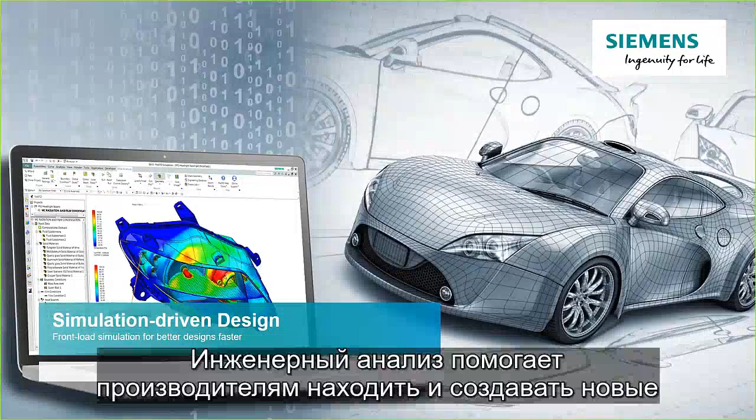So the age of simulation-driven design is here. Simulation is no longer just a performance validation tool. Simulation is becoming an organic part of the development process throughout concept and design. Simulation is leading manufacturers to discover and produce new, unimagined design possibilities aided through new manufacturing processes such as additive manufacturing.

Simulation is also helping designers create better, more robust designs earlier in the development process, while also speeding the overall time it takes to release a design, meaning faster time to market. In this presentation today, you will learn more about this new age of simulation-driven design, see how it's made possible, and learn how other companies are taking advantage of this new age today.

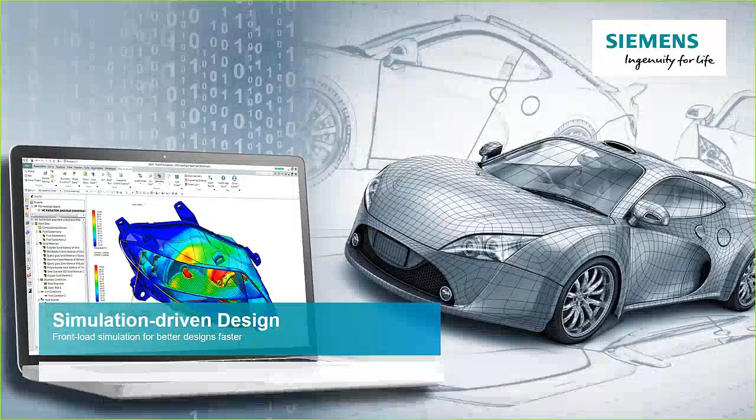So manufacturers today face many of the same challenges to stay competitive within their industries. There are bottlenecks in the development process that hinder them from being nimble and making decisions too late. Manufacturers are always looking for ways to cut costs and increase the bottom line. But cutting costs must also be balanced so as not to impact product quality for fear of losing customers. In a competitive environment, product developers are constantly looking for ways to decrease time to market so that you can introduce new innovative products before your competition can. This helps lead to greater reputation and more sales.

There's also continuous pressure to create a stream of new products of increasing complexity and functionality. But how do you reconcile this time with the time it takes to innovate with the increased pressure to deliver new products to market sooner? And finally, there's an increasing number of product regulations for companies to comply with around the globe, plus the need to reduce warranty costs, which also impacts your company's reputation to your end customers.

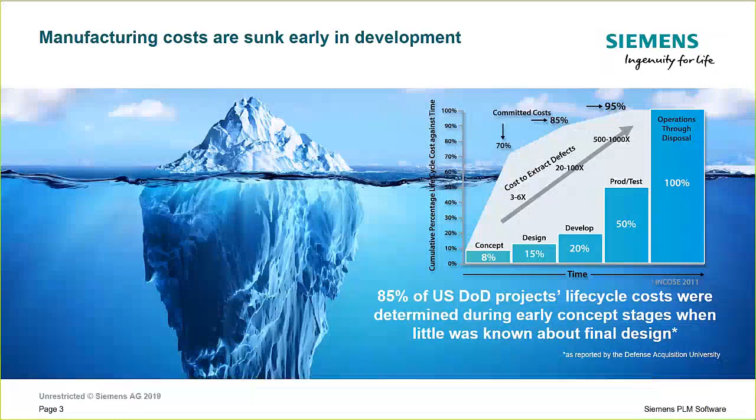Digitalization and simulation have already been game changers in helping companies find issues with their designs earlier than ever before. Simulation can have a huge positive impact on our ability to respond to these changes and has allowed engineers to gain more insight into product performance earlier than with older build and break methods of development. The advancement of simulation has led to increased confidence in simulation results. This means companies are relying more on simulation to reduce product development time, to meet market pressures, and to deliver products earlier.

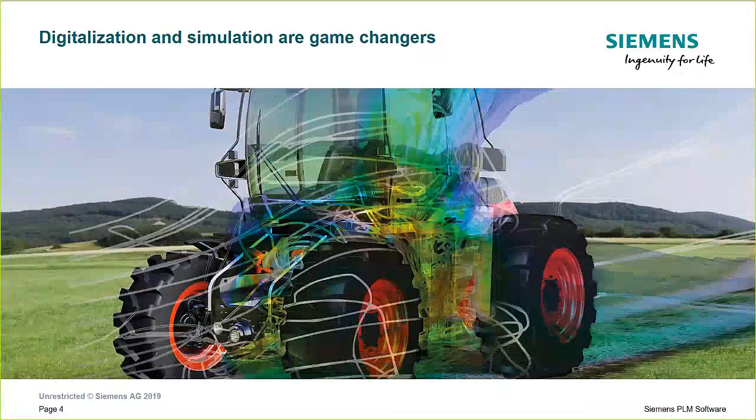So let's consider the benefits and challenges of simulation as it's been traditionally used to date. Simulation has reduced the need for physical prototypes, and gone are the days of iterative build and break cycles of the past. This has greatly reduced development costs and has also sped up development processes.

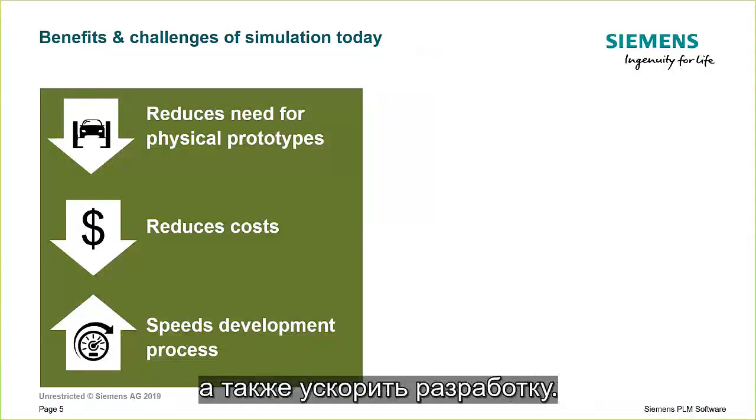But traditional simulation still has its challenges. Simulation has been a complex, multi-tool process requiring simulation experts in each of the physics domains. It's also an iterative process between designers and analysts, where designers would come up with a design and then wait for analysts to provide feedback on their design. And since there are usually far more designers than analysts, the CAE team was often overwhelmed, and designers would wait a long time before moving forward with changes to meet performance requirements.

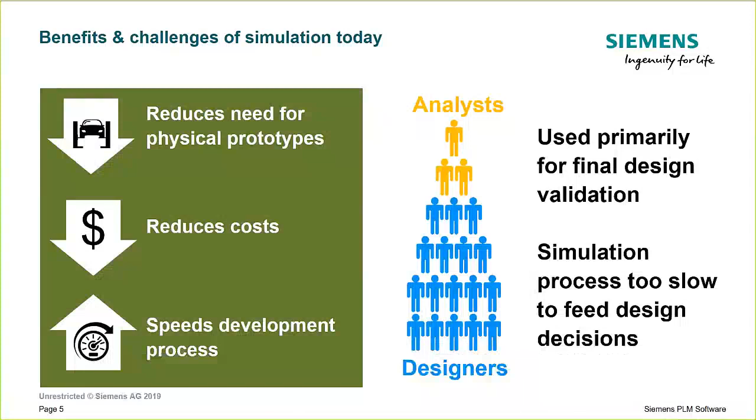What this means is that traditional simulation is a bottleneck. Designers first create the first iteration of a design, then hand it off to the simulation team for feedback. But the simulation team is overwhelmed, and the traditional CAE process is time-consuming, which means it takes a very long time before the simulation team can provide feedback to the designer.

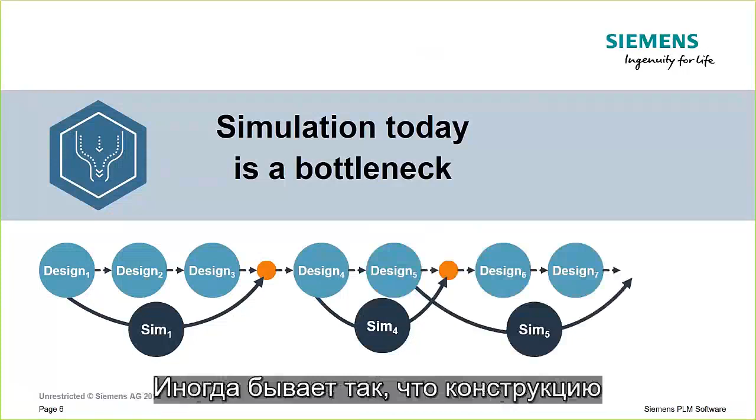So many times what typically happens is that the designer continues to iterate on a design just based on educated guesses and prior experience. By the time results come back from simulation, the results are already out of date and out of sync with the latest design. This process would continue for a number of iterations, and it often might be that a design gets released before the development organization is fully confident it can meet performance requirements. They hope it passes final testing.

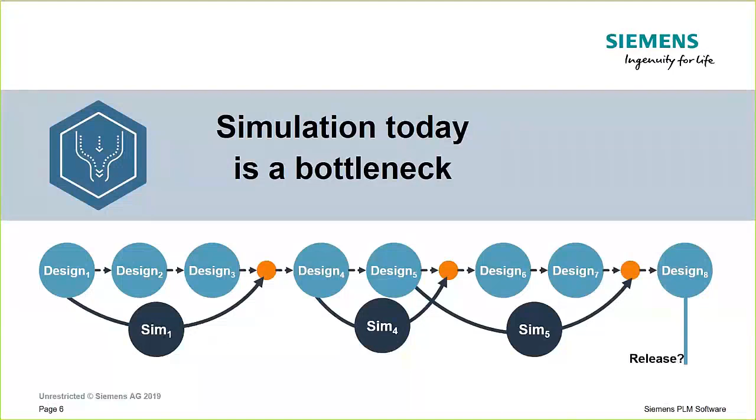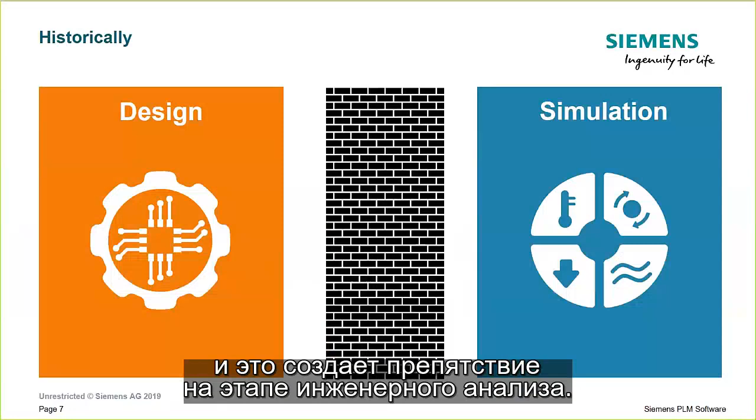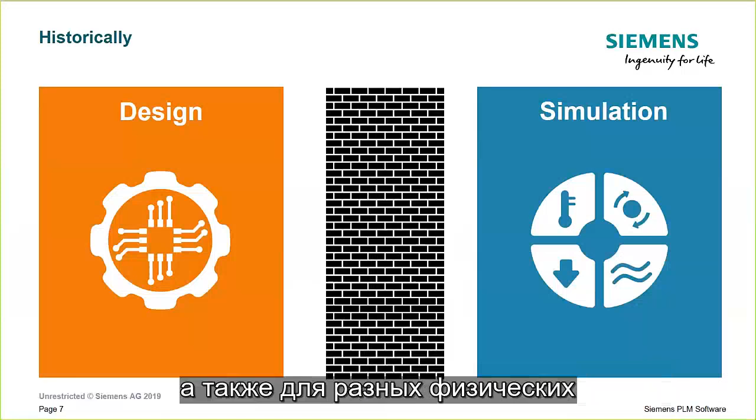Why has this been the case? I already mentioned that there are many more designers than there are analysts, which creates a bottleneck in the simulation process. But even beyond the differential in numbers, historically, there's been a wall between design and simulation. Designers create their designs in CAD, and then throw these designs over the wall to the simulation team. The simulation team historically has used a variety of specialized tools for various parts of the modeling process and for differing physics domains and solvers. This is one of the main reasons why the simulation process takes a long time and delays feedback to design teams.

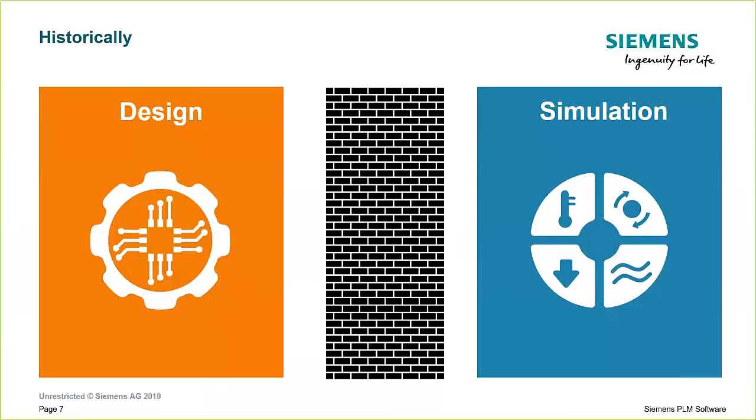But there is good news. The age of simulation-driven design is here today. Innovative manufacturers are taking advantage of advances in technology and development processes to beat their competitors to market with higher quality and longer-lasting products.

Simulation is now mainstream, and we're truly in an era of simulation-driven design where simulation can be used to synthesize and define the physical design rather than to simply evaluate and validate completed designs. The fundamental trend for simulation is that it's becoming better, faster, cheaper, and even easier to use. This has enabled simulation to be used earlier and throughout the engineering development process, from concept to detailed design and performance validation.

In a survey and report conducted by the Aberdeen Group of various manufacturers, they found that leading best-in-class companies recognize the issue of the simulation bottleneck and are increasingly front-loading simulation into their design processes for use by designers. Aberdeen found that 73% of best-in-class organizations are using simulation as part of their detailed design processes today. This has helped organizations using simulation-driven design methods to reduce their development time by 29%, as well as deliver products that are more likely to work the first time and require less rework later in development stages.

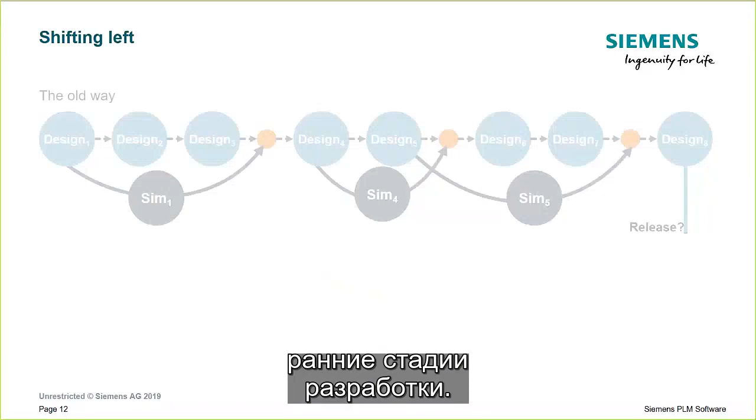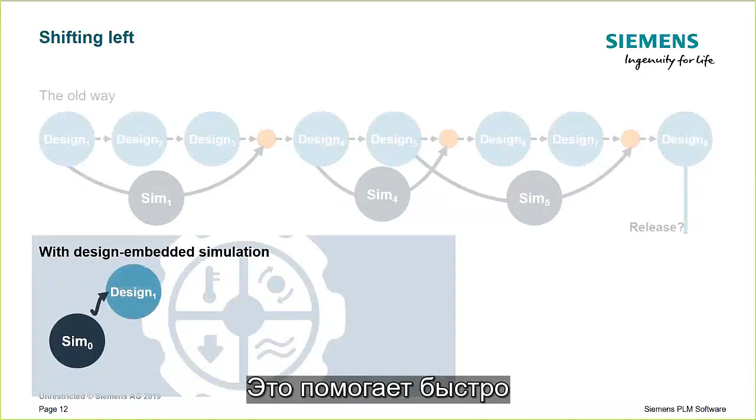Simulation-driven design helps you further front-load simulation in your design cycle and shift your development processes further left. With simulation-driven design, it's possible for designers working within their CAD environment to start the design process by using simulation first, which helps define what the initial design will be. After getting that initial shape, the designer can continuously perform a simple qualitative simulation on each design iteration to make sure the design is on the right track.

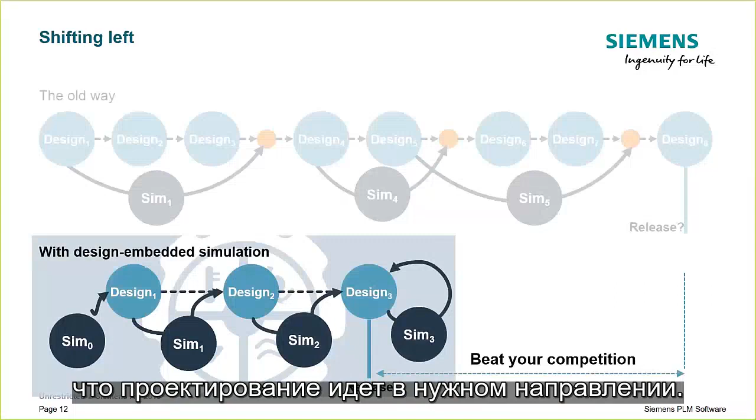This helps the designer achieve a more robust part that can be released more quickly than competitors still stuck in the old way of doing things. It also frees up your simulation team by reducing the amount of time spent on routine analyses, letting them focus on more complex types of analyses.

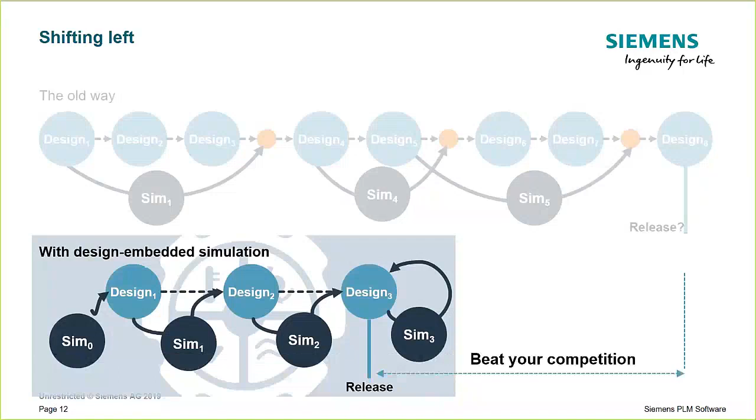At the conceptual stages of development, simulation-driven design can be used to discover new, unimagined design possibilities by using simulation to define a part's shape right from the start.

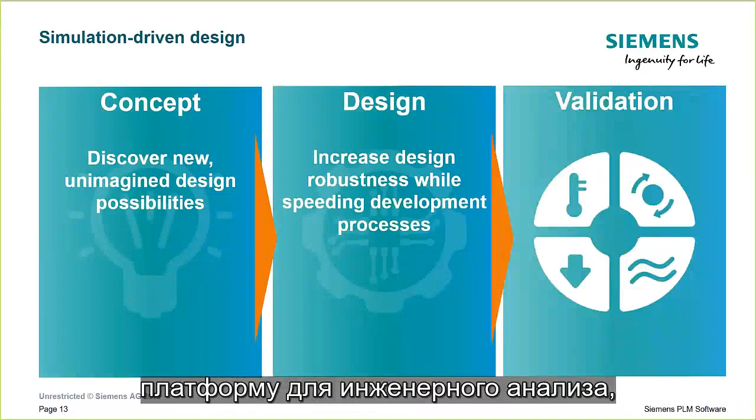Next, embed simulation into your design process to increase design robustness while speeding development processes at the same time, to get to product release faster. And leverage the scalability of an integrated simulation platform to easily transfer designs and prior simulation data to the CAE team to rapidly validate that products meet performance requirements.

Now you might be wondering how your design team is going to be able to perform simulation. You might have heard some of these concerns and objections in your own office. In the past, learning simulation generally required learning at least one new interface, perhaps even several. Even preparing a model for solving could involve multiple steps and applications.

For example, one CAD system might be used for authoring the original design data. Another may be used to simplify the model and fix problems. Then the CAE application would be used to apply a mesh, loads, and boundary conditions. All of these different applications make it difficult, especially for an occasional analyst.

Others state concerns around accuracy and usefulness of results created by designers. Concerns are often raised stating that producing results is easy, but understanding them is much more difficult. There's much more discussion about how inaccurate results can give a misleading impression about a product's performance, or that results could be misinterpreted, leading to expensive or even dangerous mistakes.

To help overcome these barriers, we first need to make the simulation process more accessible to designers. Simulation needs to be placed into the CAD environment that a designer is already familiar with. This helps lower the training barrier for pure software operation because a designer doesn't need to learn a completely new software system.

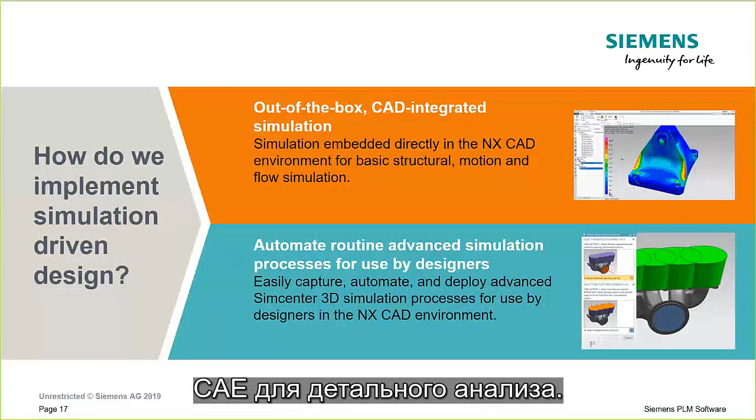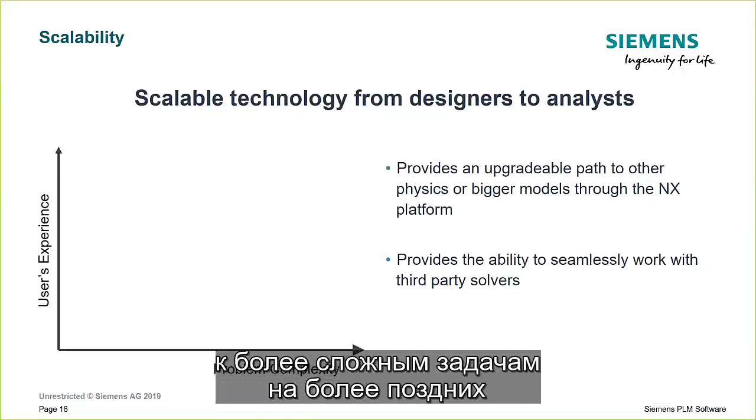Scalability is also critical in allowing the development process to grow from simple analyses into more complex applications later in development. Simple single-part analysis is possible in NX CAD bundles at the entry level. From there, it's easy to progress to the assembly level and onwards to complex multi-physics applications in Simcenter 3D through the NX platform. For example, a simulation model originally created by the design team could be taken and reused later on in more complex assembly analysis by a simulation expert.

Simcenter 3D is also solver neutral, so where there is a requirement, any of the major third-party solvers can be used seamlessly with the Simcenter 3D environment. For companies that need to use multiple solvers, the training need is minimized by using a common interface.

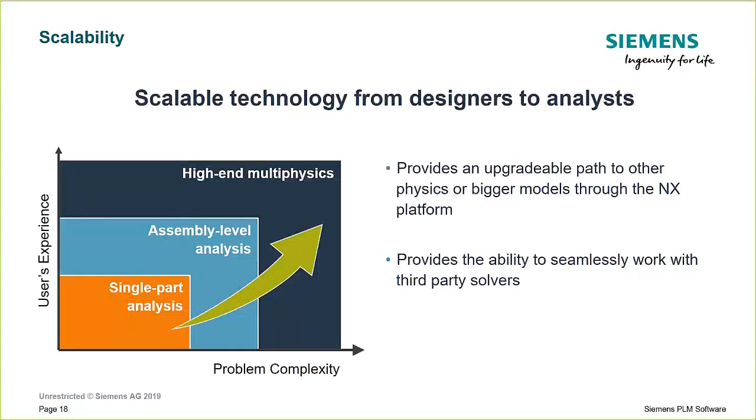So customers today are already taking advantage of simulation-driven design to reduce development costs. By putting basic simulation into the hands of designers early in the development process, you can make designers and your CAE team more productive because designers can get feedback on their designs more quickly and your CAE team can focus on more complex analyses. It also means that you can achieve better performing products earlier in development.

For example, Renault reduced headlamp costs by 50% within 2 years, partially by using thermal simulation within their design processes to reduce the package size for their headlamp while still maintaining thermal performance of the system.

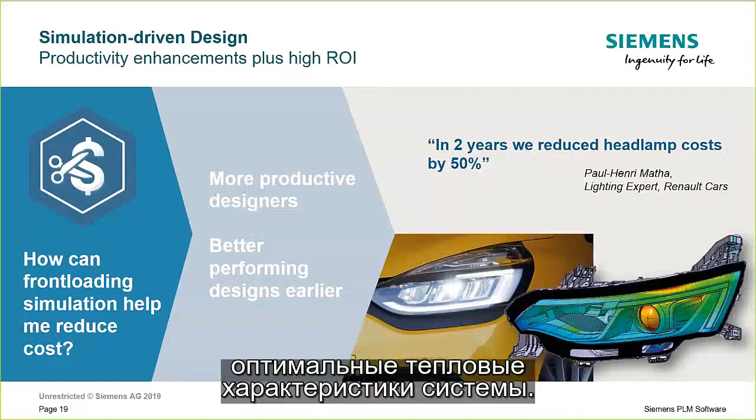I've also shown how simulation-driven design helps to eliminate the simulation bottleneck. And this then helps you get your products to market faster than your competition can.

With simulation-driven design, customers gain a better understanding of how different designs impact product performance earlier, which means you can make better informed product decisions. And since designers are basing these design decisions off simulation, you can spend far less time on final validation and verification downstream.

Guangxi Yuchai Machinery, the largest producer of internal combustion engines in China, uses simulation-driven design to help them meet market demands for more personalized products. Greater personalization means more product categories, but with limited dedicated CAE resources, it becomes almost impossible for them to promptly feed CAE analysis results back to design engineers. But by implementing simulation-driven design methods within their designers' NX CAD environments, designers could begin using simulation to get immediate feedback on how their designs will perform.

Another example is from Jazo, which develops protective housings for electrical, gas, telecommunications, and boilers. These housings need to permit maximum airflow while at the same time fulfill stringent requirements for fire, rain, snow, dust, and intruder protection. Jazo has an extensive range of products that they then need to customize for each customer's requirements. And so getting a quick turnaround to their customers on performance feasibility is critical.

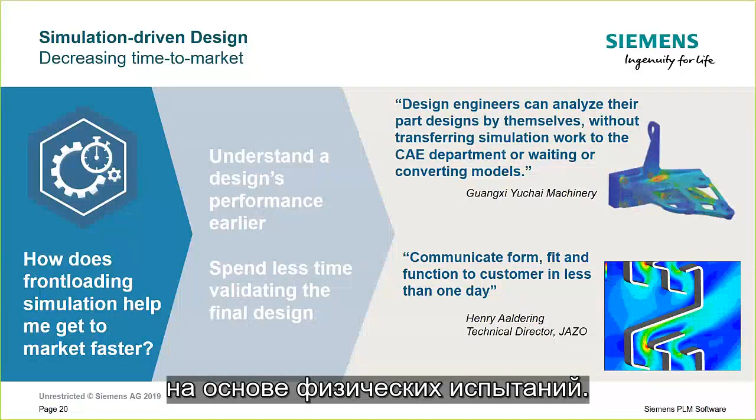Innovation is also key to staying competitive, but it's also perhaps the most challenging to achieve. Determining a new part shape isn't intuitive. Many times, designers start new designs simply based on existing designs. They might take a part and try to remove or add material by tweaking existing features and dimensions. This means newer design concepts are never considered, and modifying an existing part might actually create an over-designed part for a particular application. But trying to think of completely new part design takes time. Where do you even begin?

Experience helps, but intuition doesn't necessarily create the best part either. If the development schedule is tight, do you have time for a long trial and error process of creating the right part, then simulating to see if it works?

Simulation-driven design can help you find the right part shape by using structural performance-based simulation as a starting point for determining new designs. This often leads to lighter designs that can still meet performance requirements. Simulation-driven design also lets you simulate many more design variants earlier in your development cycle, so you can select the best performing designs.

Mitsubishi Materials Corporation uses simulation-driven design to study various design variants to optimize the liquid cooling channel opening to improve cooling system performance for advanced cutting tools. Even though Mitsubishi Materials doesn't have specialist CFD analysts, their designers were able to perform the basic CFD analysis easily within their CAD environment and ultimately achieve an 11% increase in flow rate through the cooling system.

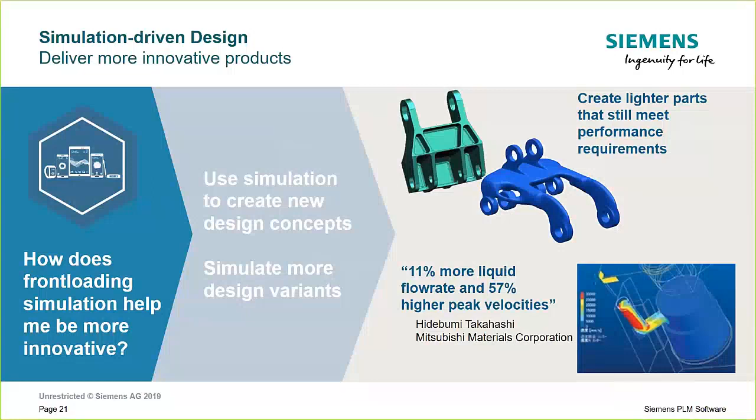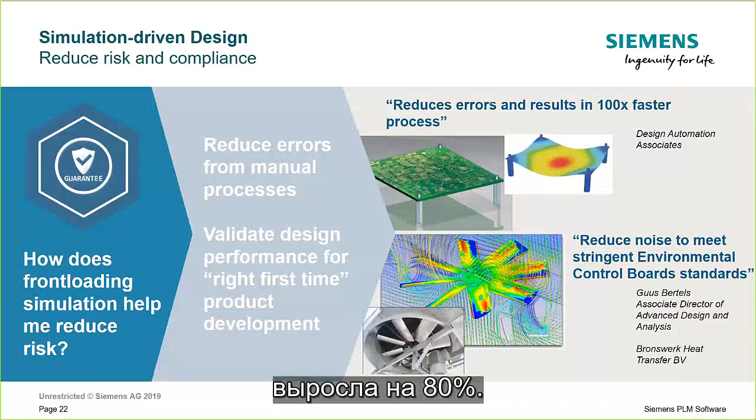So the age of simulation-driven design is here today. To reiterate, you can use simulation today to discover new, unimagined design possibilities, embed simulation into your design process to speed feedback on design performance, and increase design robustness to achieve faster development processes. Finally, leveraging the scalability of NX and the SimCenter platform to easily transfer designs and prior simulation data to the CAE team to rapidly validate that products meet complex product performance requirements.